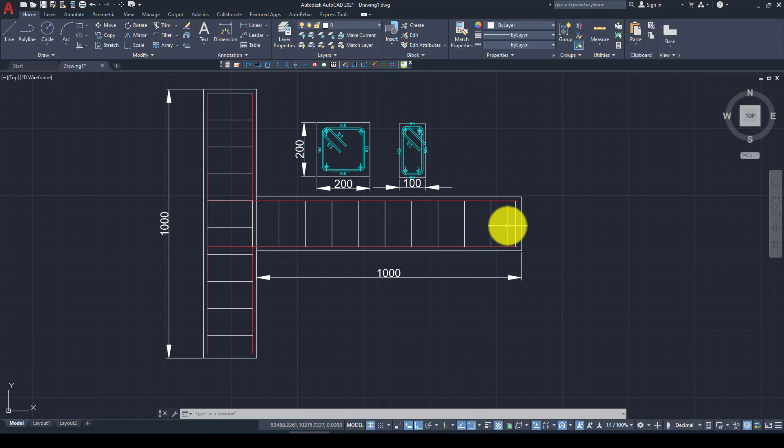The structure properties: 1 meter length of the column and 1 meter length of the beam. The cross section for the column is 200 by 200, with 4 rebar of 10 millimeter diameter arranged at the corners, using stirrups of 6 millimeters. The beam uses the same rebar, but the depth is the same and the width is 100, so half.

Now we go to model in ABAQUS. The material we're using is concrete 24 and steel Q235.

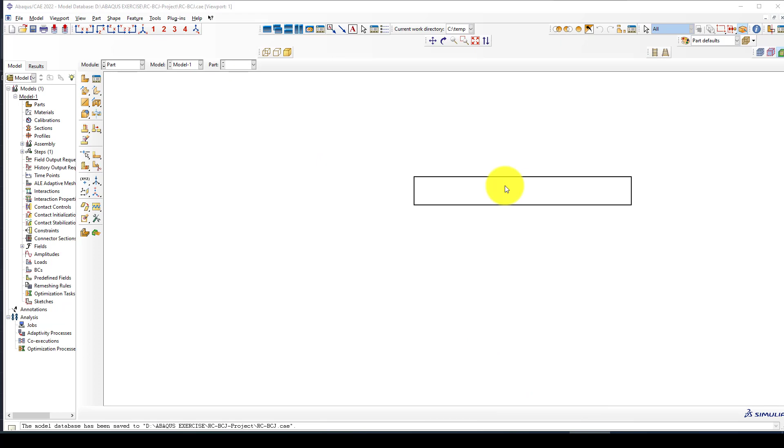Here is the program, and we go to quickly draw the column. Using solid elements, we can give about 2000 extrusion. Since this is 200, I'm going to go minus 100 by minus 100, and the positive one is positive 100. This is the column, and the length is 1000 millimeters.

The second part is the beam, using the same method. This time minus 50, which is the width of the beam, and minus 100, which is the height, and the second point is positive 50, 100. This is the beam, using the same technique, with length 1 meter.

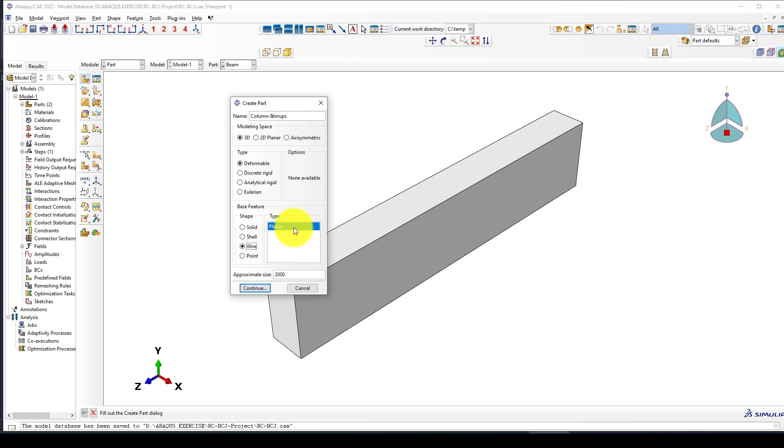Now the second part is we want to define the rebars. First I'm going to define the stirrups for the column, using wire planar and giving this data. The clear cover is 20 millimeters, so it becomes 160 by 160.

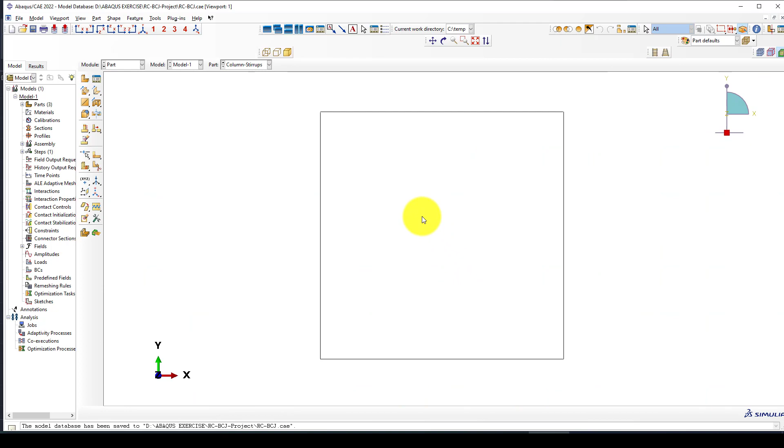Now taking the rectangle and giving minus 80, minus 80 and positive 80, positive 80. So this is the stirrup for the column, and we can go to one more called beam stirrups.

Using the same method, we check it again, and this is 10 millimeter, 80 by 180. Now we select this one and give minus 40, minus... and this is minus 90, and again 40, positive 90. So this is the stirrup for the beam.

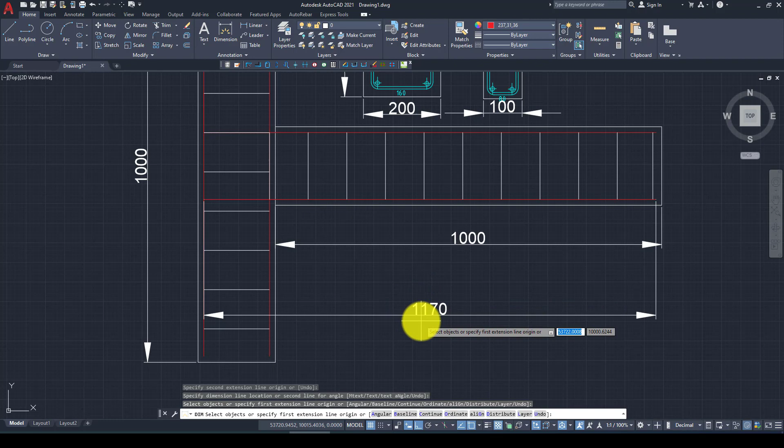Call this column rebar, using wire element planar, and I'm going to give 0, 0, and 980.

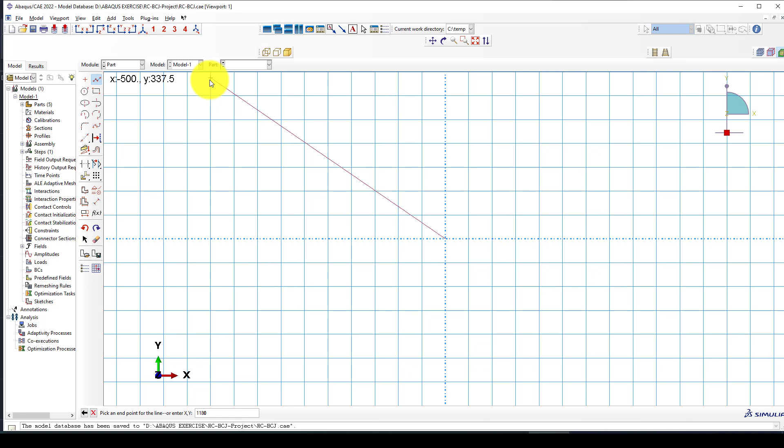So this is 2. Now we finished defining the parts, and I'm going to define the material properties here. I want to define concrete 24. It is in my library, concrete 24.

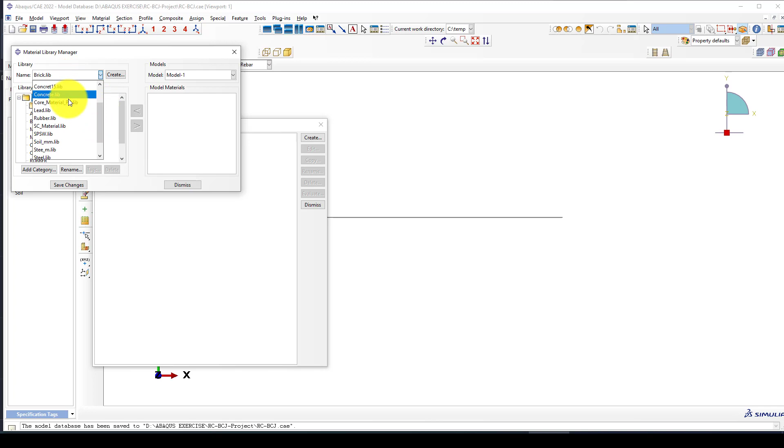This is CDP concrete 24, and I want to use steel Q235. You can see here. Here is steel 235, and now we can see the inside material.

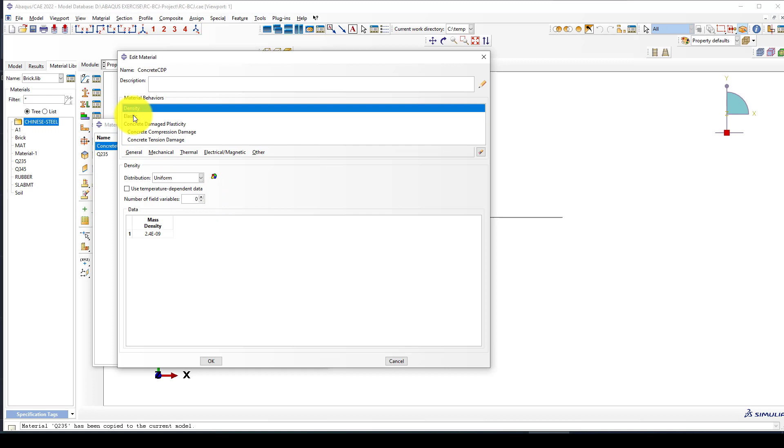So we will conduct a dynamic analysis. We need to define density as well. So density, elastic modulus, and plastic - these 3 properties. For the concrete, here is the density, elastic, concrete damage parameters, compressive behavior maximum 25, and the tensile behavior, and also tension damage, and other behavior.

So we're going to use a calculator: pi times d squared. d squared is 100 times 3.14, and divided by 4. So this is the number, 78.5, for the 10 millimeter.

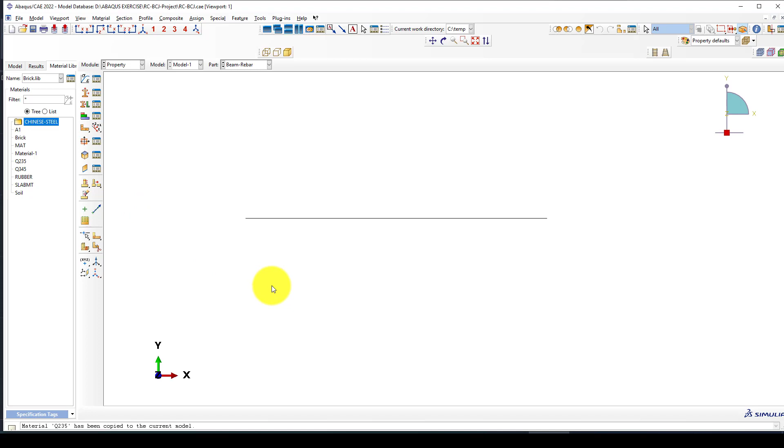And we want to define one called stirrups, and this stirrup is 6 millimeters, so we can get 28.3. If I calculate this one using the calculator: 36 times 3.14 divided by 4 equals 28.3, or 28.2.

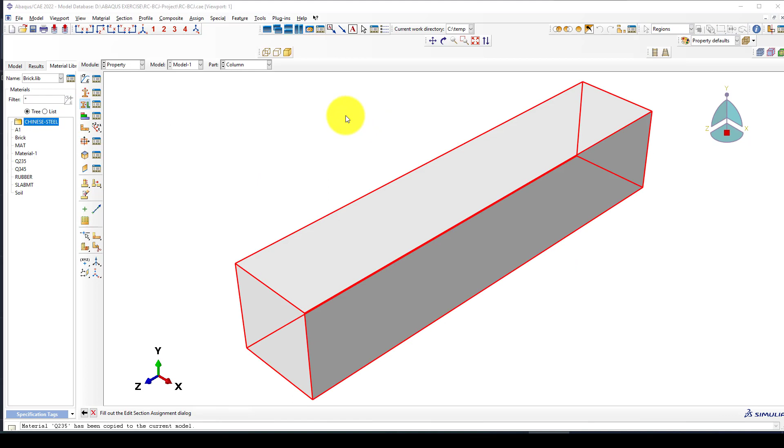Material - now we define the material, and I'm going to assign them. This is the rebar and beam. I think beam is concrete, and beam rebar, beam stirrups, and column stirrups, and finally rebar. Now we create it and assign materials.

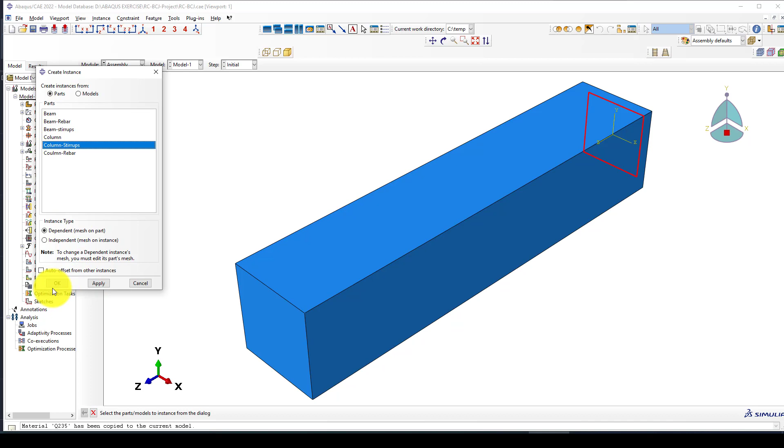We go to assembly, and first of all let me bring the column, and this is the column. Apply, and we want to take the column stirrups. So now I can use this function, and you can see it's in the center, but we want to take that rebar.

Let me temporarily delete this column, select this one, and push it 10 millimeters in the z direction. So start point is 0, 0, and 10 millimeter. We put it a little forward, and you can go to C, and it's inside.

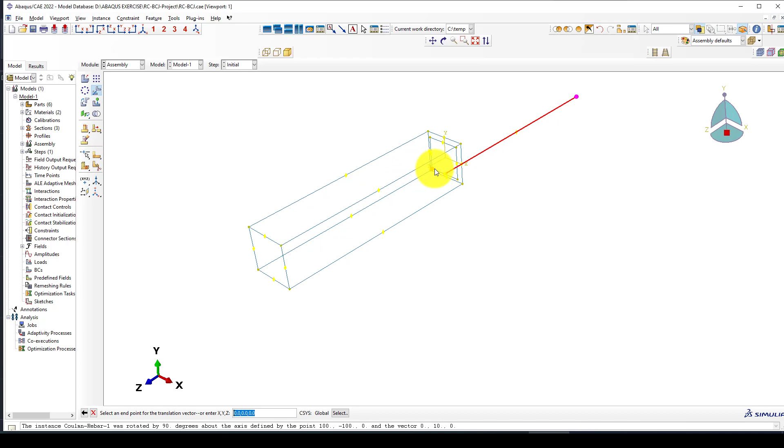If I go, okay, now next I want to bring the column rebar, and this is column rebar here, and I'm going to rotate using this axis, and I'm going to pick this rebar, that point to that point. So now let's click.

One more thing, I want to take that rebar, take this one and populate, and this is about 160.

So we created another 4, and I want to take this one again, but bring it a little further because the longitudinal rebar isn't correct, and I'm going to bring it a little further. So 0, then 0, 0, and this is with 10. Now it's better and correct.

Next I want to populate this one, taking this direction, I'm going to bring it forward, and this is off, and we can use 120. Populate. So this is the column, and it's correct to here.

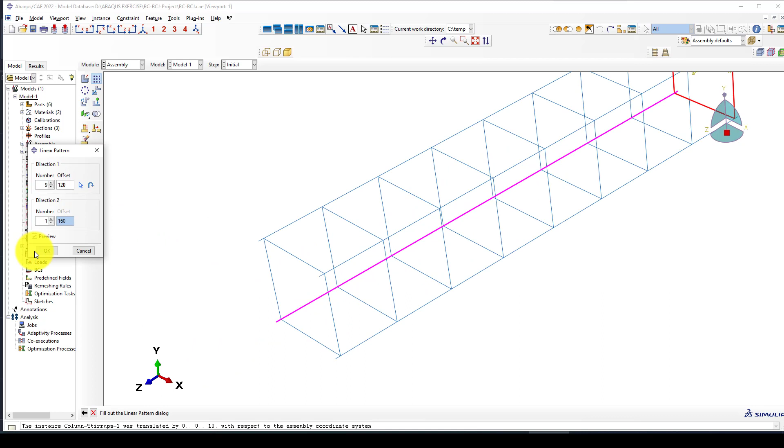Okay, so now we finished one part. So now next is I'm going to remove and select all of them.

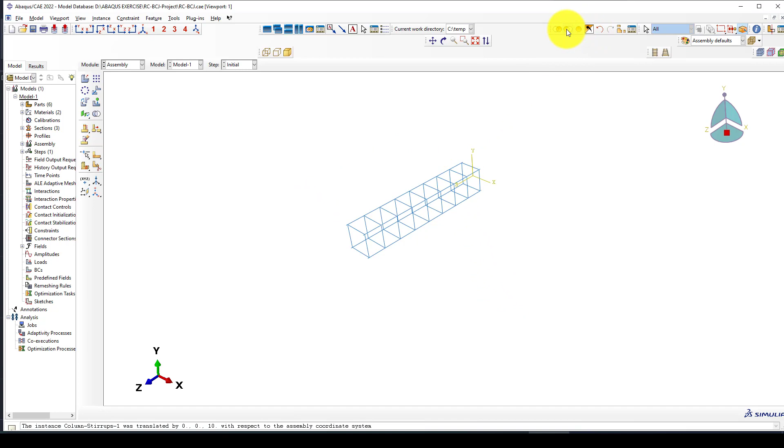Okay, and now this is part, I'm going to remove all of them, and then I want to bring the beam. This is beam, and this is beam. Apply, and the beam stirrups.

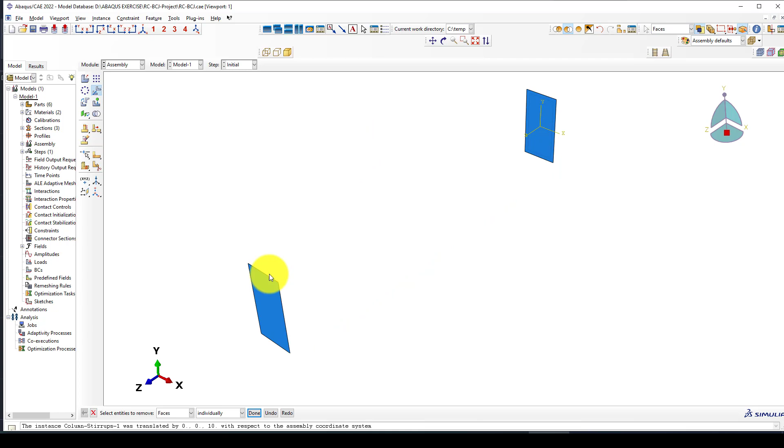Okay, and we can see the location is correct, but we want to bring it a little further. So we can go to here, and selecting this one, I go to undo.

Going here and just beam, remove it, and I want to take this one first, 10 millimeter, putting 0, 0, and then going to 0, 0, 10 millimeter, and that's it.

Next I want to bring the beam rebar, and I want to rotate across this axis, and I want to take it here, take this point and bring it to this area.

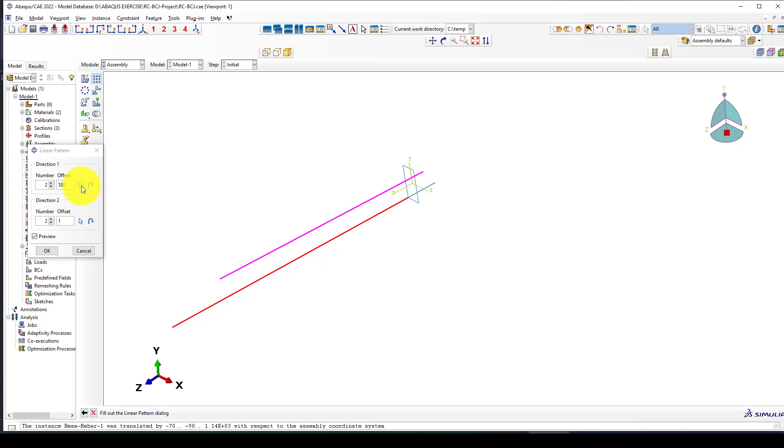I'm going to populate the rebar in the 4 direction. The height is 100, 180, 180, 180. Now you can see here, and this is also 80.

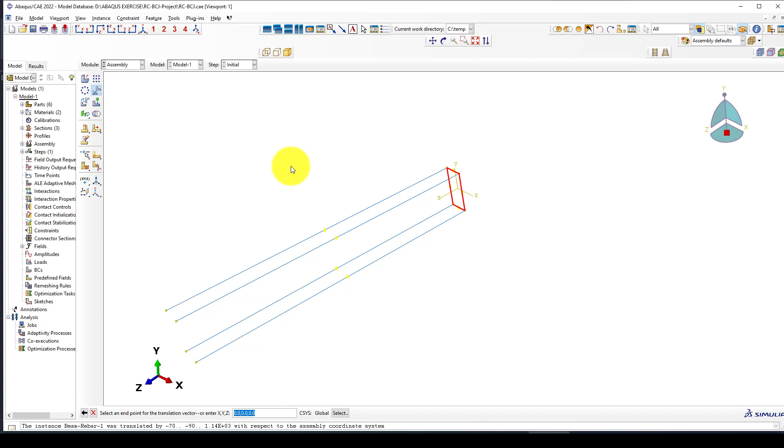And now we can just select here exactly. Okay, so one more thing, I will take this again, and this time putting 0 and 0, 0 and 10 millimeter.

So this is correct, and I want to populate this across the structure. This is also 120. Select this one and exit.

So remove these parts. Going to be, so this is okay, and even I can make it 10 and 10, and this is 100, and we want to move. If I go to add all, no need.

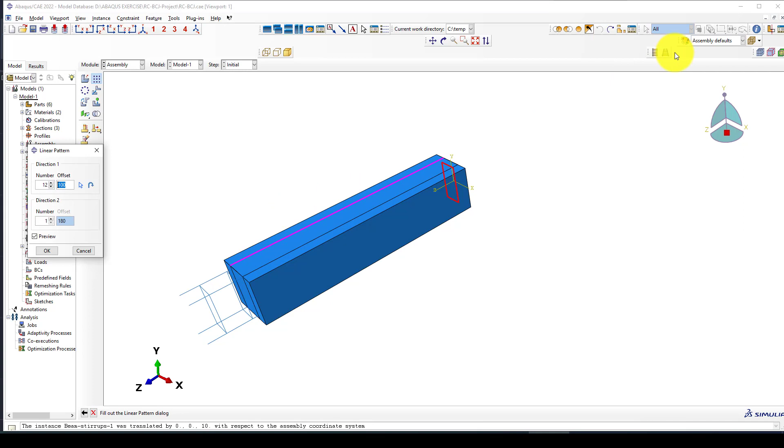So this is 2 is out. I'm going to take them 2 out like this. Now it's okay, and we created this area.

Now what we're going to do is bring the column at the beam, and I want to rotate, selecting all, and rotating this using this direction. So it's a little not in the right side, but I'm going to add everything.

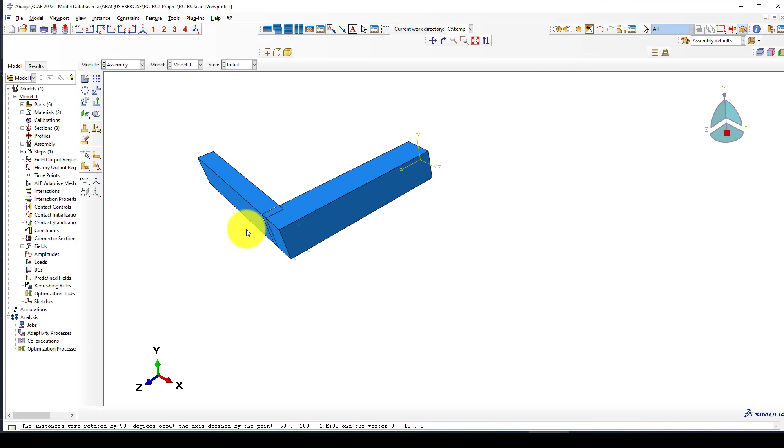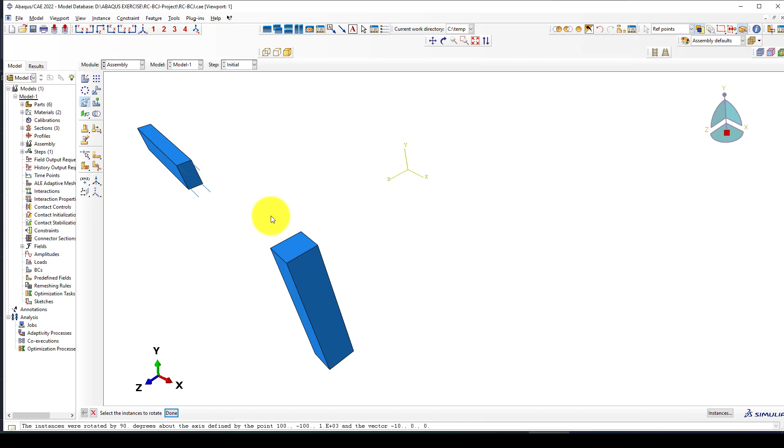I'm going back here and making a little changes. So I'm going to put this to there, and now I can bring this as well. So I want to rotate this, selecting this one and this one here, and I'm going to take this.

Select all, and I want to put this to 0, 0. So now I want to take this one and rotate one more time, and that should be 180.

So it's correct now. So now before I put in the right position, I want to go to the part and take the column, create some partition. So I use this method.

It is called create datum plane from offset. So I'm going to click this one, and I want to define the location of the columns. So if I go to here, and I can select this point 400, and this also 400.

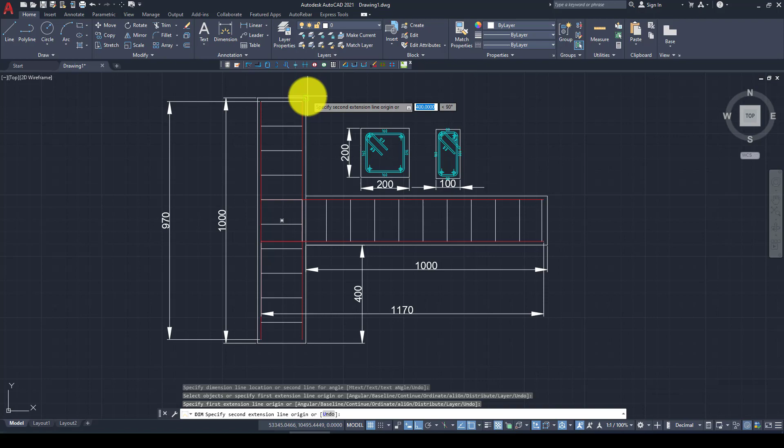So what I want to do is going to enter value, and it's going to flip that side. Okay, and it will be 400. So one in another one, going to select this one.

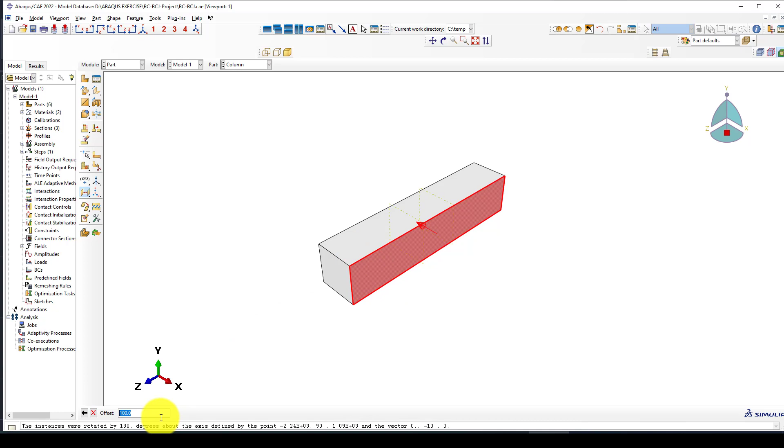Okay, and this time going to 600, which covers the 200 height of the column beam. So now in this direction here, okay, the depth of the column is 200, so it's be 50 one side, 50 one side.

I'm going to use this one again, and this is 150. So 50, 100 the depth of column, 150. So here, now I want to create some partition using this one.

So selecting this column and selecting this one, selecting these three, and this one. Now we created some partition that's very important, and we can see here. If I want to not see this, I can go to the view.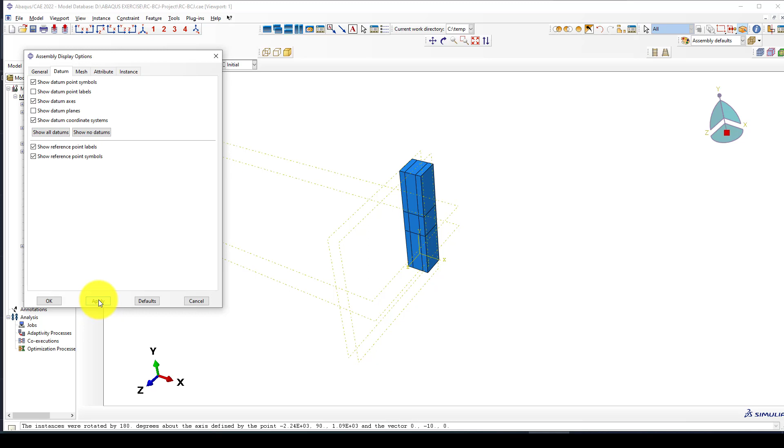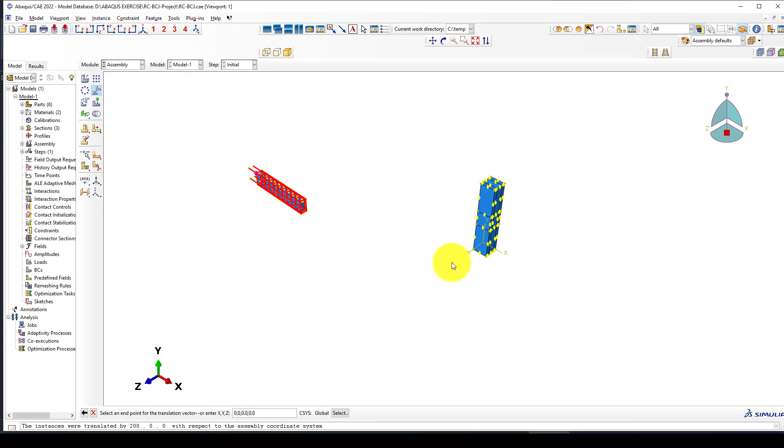Now you can see there is hiding. So what I want to do is rotate this one again, select all, and into here select 180, and bring it to the center at 0,0. Now this is completed, and I want to take this point and bring it to this point, and now it's totally correct in the right position.

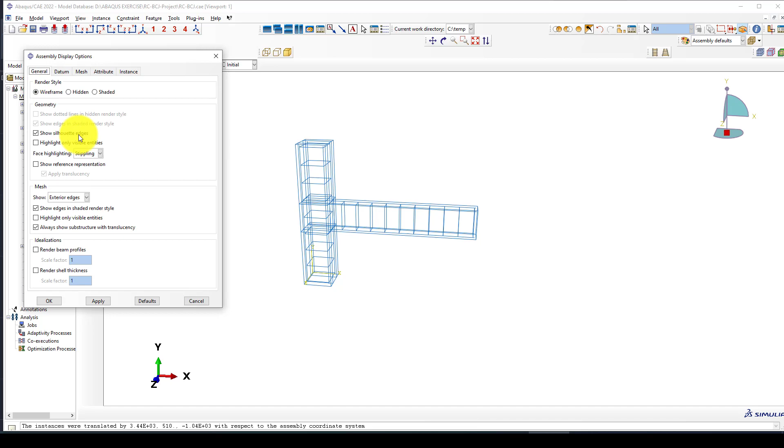If I go to here, you can see the rebar configuration and everything is properly right. So I can also go to view and show some rendering, select the beam rendering, and you can see how it looks like. And I can go to use section, and if I go to change the longitudinal rebar to something, here it is.

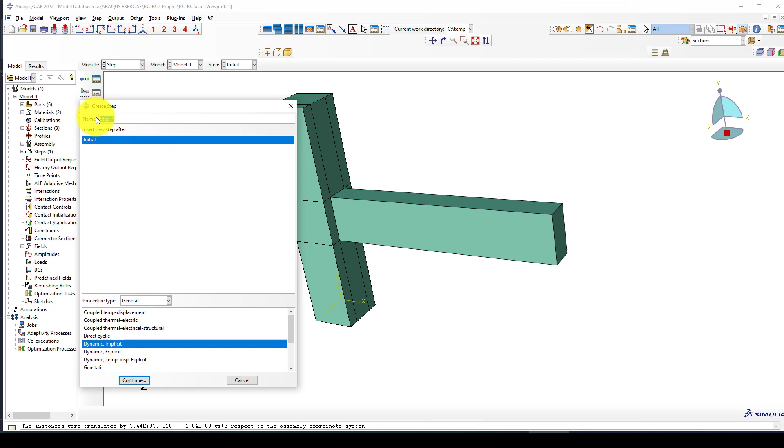So we finished in this area, and we can go to the step. We can direct cyclic dynamic, which we use quasi-static or cyclic application. I'm going to use implicit.

And we can create one more thing: the loading for the steel structure we can apply in this part, but for the concrete column it's not correct. We should create a partition in this region and define this location.

So what I want to do is go to part and select the beam. I want to create one partition in this region. I'm going to select this one, and select this one and flip, and I'm going to give 50 millimeters. So this is a small area, and I'm going to partition this one.

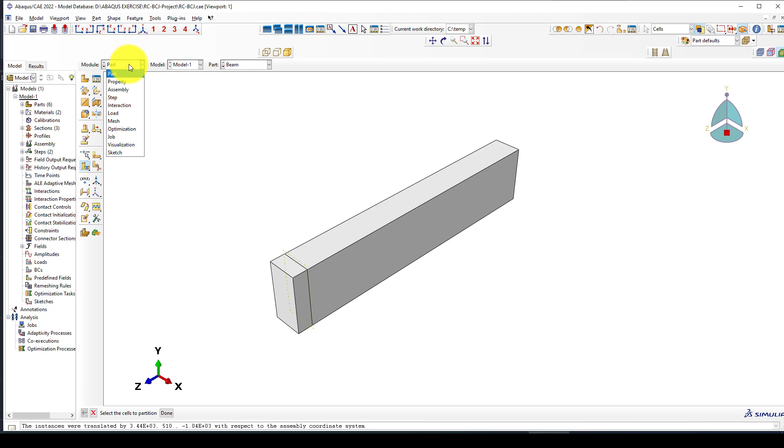If I go back to assembly to see how it is, it's here, but I can go back to part and delete this one, and delete this, and redefine again, this time flip, and I'm going to use 950, which goes here, and I'm going back to this one, and it's going to create, going to assembly, and we created this location.

So you will apply load in this area.

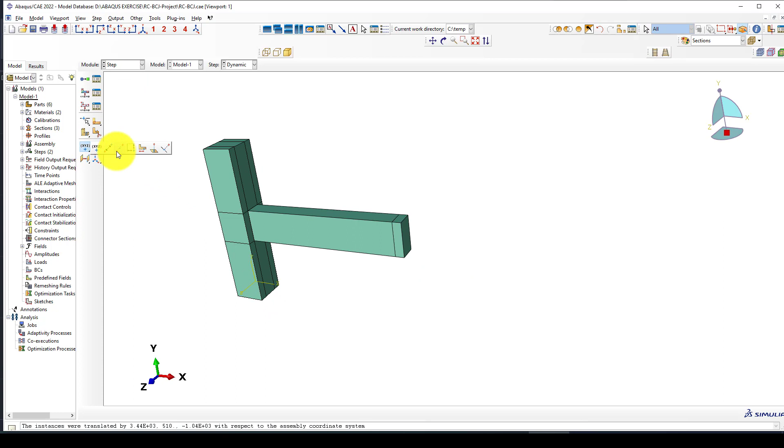Next we go to the step and we can create some points. Let's create a point in this two center, and let's create one point in this two center. Because our work is not considering the top and bottom of this structure, instead we are focusing on this beam-column joint. For this purpose, we will consider a diaphragm on top of this, or a stiffener in this area. We're not focusing on seeing the behavior in this area as well as in the bottom, and also in this area too.

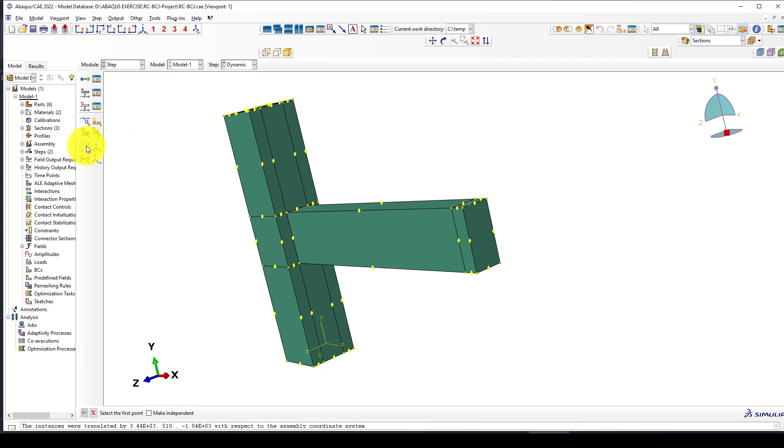So this is it, and we want to create some reference points. This is the first reference point for the loading point, and this is the second, considering this other side is quite stiff. We are not going to deform these parts.

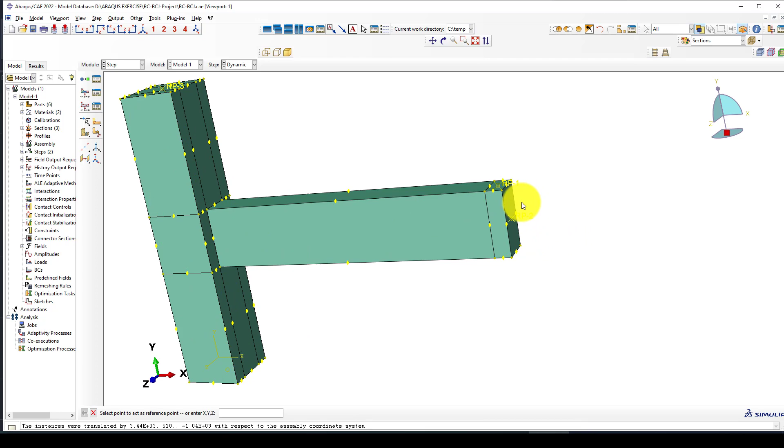In practice, let me show you here is the paper. Here is the paper, and on both sides for the loading we have some support. That means they will actually not deform, but instead the deformation concentrates in this joint. So we will focus on this area, and we will add some diaphragm in these two other areas.

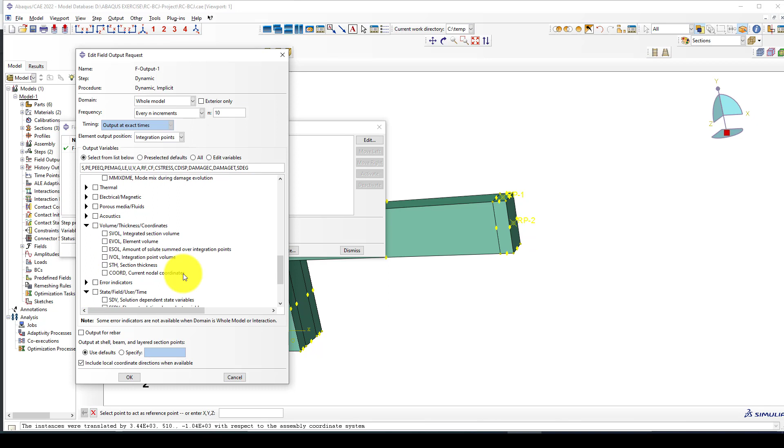Now what we're going to do is I'm going to create and define some extra output. Let's take the failure damage, and I can see the scalar stiffness degradation, and also some other deformation.

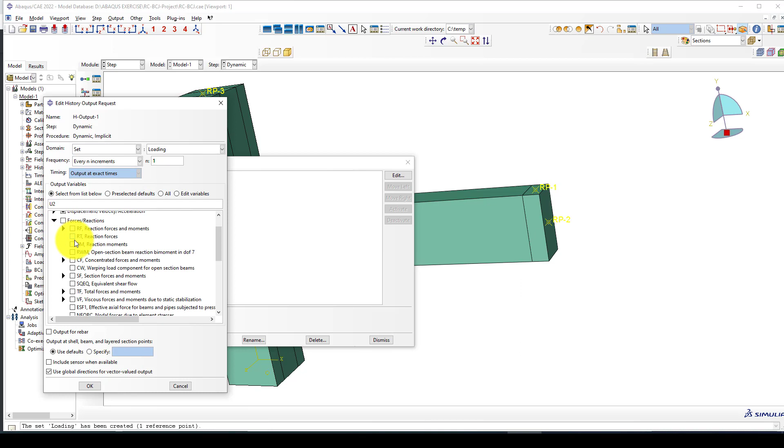And the last one is to create history output, especially the reaction force and displacement at this point. So I'm going to create a set, and I can call it loading point. That loading point is this reference point, and here I don't want to get any energy output, so I'm going to select the set and this one, and give every increment. So that's all okay, missing value. We have to define the U2 in this direction and RF2 and this one. Now we've almost finished here, and we go to the interaction.

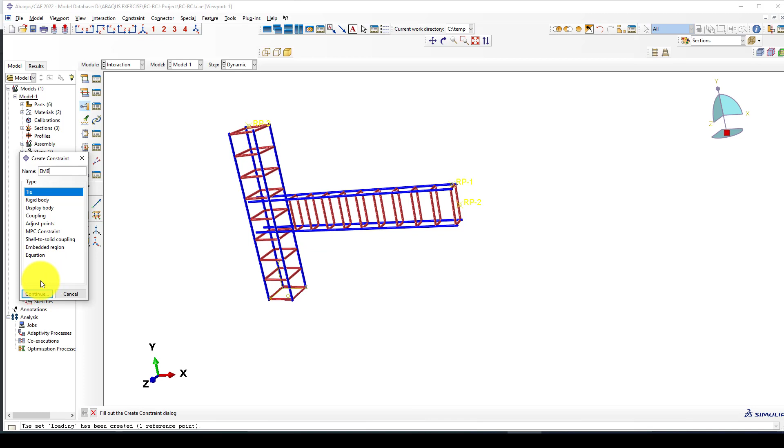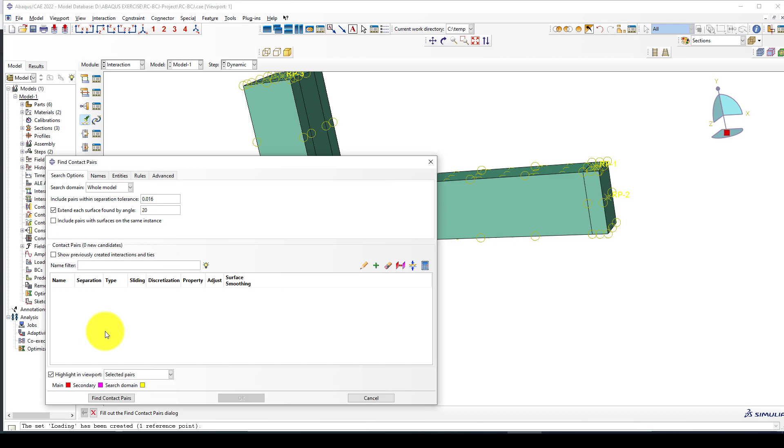So now we define an embedded region for the entire structure, and next I want to define a contact between this concrete and beam column. I can go to determine here automatically, and find one contact, but that's not proper because it's contacting with a large area. So I'm going to use another method.

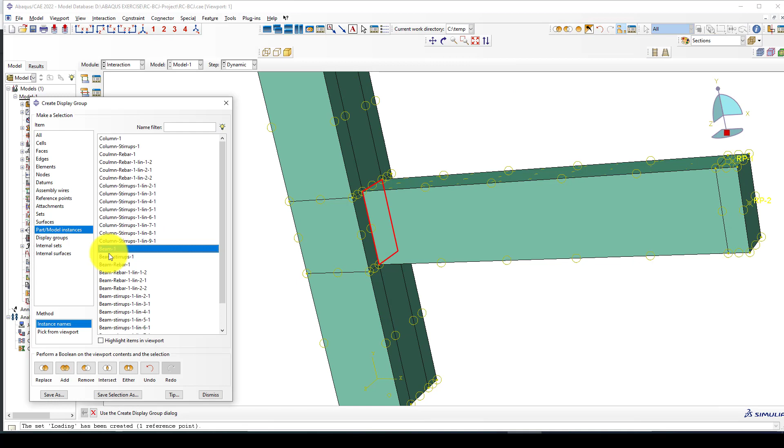I can go to contact, not surface to surface, but instead use tie. I want to select node region. I'm going to take the column, replace, selecting this surface, and add another node region, selecting everything, select beam, replace, and now selecting this area. So we created the surface to surface contact with the tie method, which has no deform movement, which is quite practical.

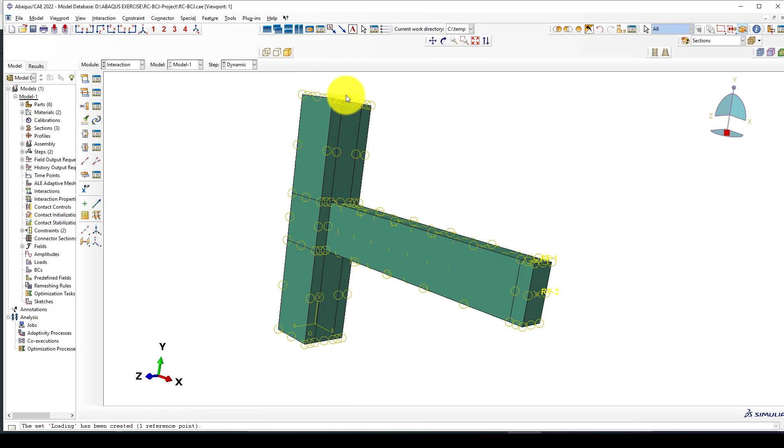Now we finished, and now we want to define some multi-point constraint, tie, or coupling. It's up to you, the behavior is the same. If you use tie, coupling, or multi-point constraint, it's okay, not too much difference. I will use multi-point constraint.

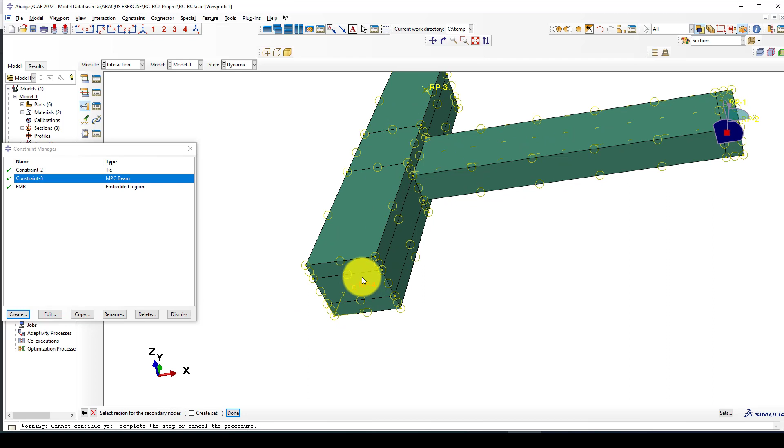I'm going to select this surface, this surface, this surface. So this is it, and I create this point and one at this point. I forgot to define first, let me define a reference point here, and now it's done. I'm going to create, selecting this one and selecting this area.

Now the next one is this one. Create one other multi-point constraint here, and selecting this surface. For this one I can use coupling, so there's no problem. I can say coupling this point as coupling, and it asks me to take the point, select a control point, and this is the control point, and I'm going to use node region.

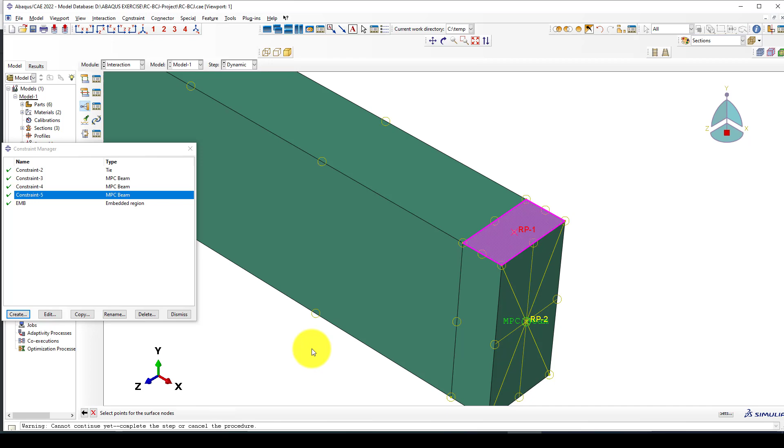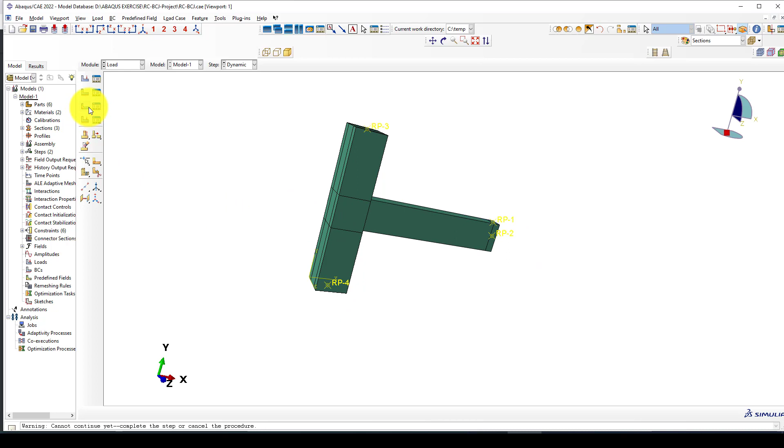So we finish the interaction step, everything. Now we want to go to the loading. In the loading, I want to consider this side is totally fixed, and I can go here in the static, call it fixed, symmetric, fixed.

And I can call it fixing ENCASTRE. So the last one is we're going to go to the displacement, using the dynamic, using this one, and selecting this point. What we're going to do is give a minus 20 during 5 seconds. You don't need amplitude here, though you can use one, but in the next tutorial we will consider the cyclic loading, so we will define an amplitude too.

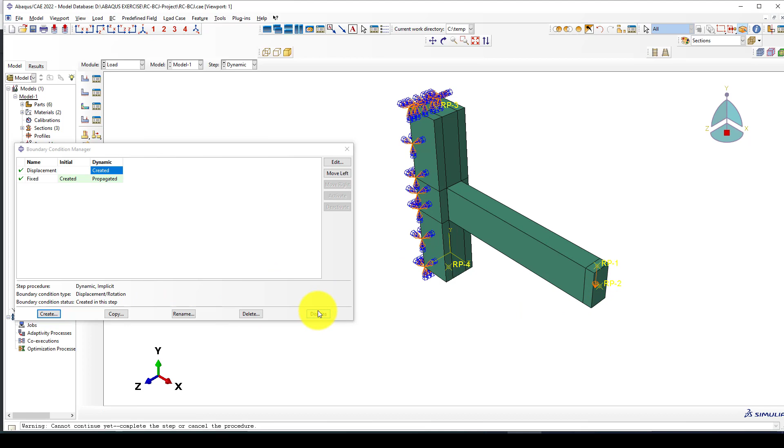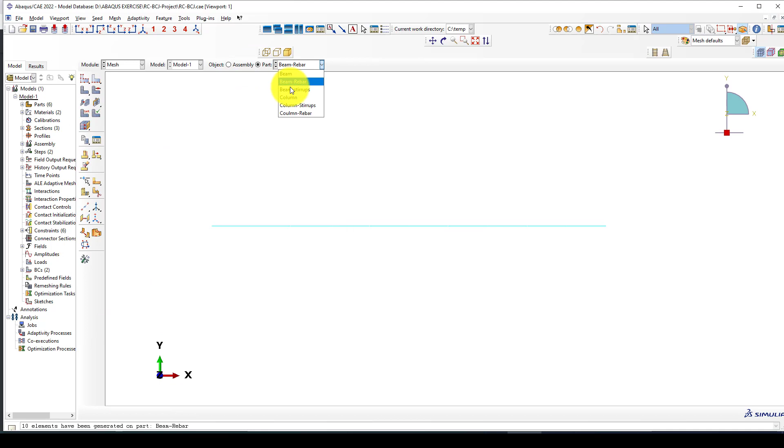So now it's okay, we finished, and we go to meshing. Into mesh, and here is meshing, and I want to give a mesh size of 50, which is maybe quite large. Beam rebar at 50 is okay, and remember to define the element type because it's using beam, so this is actually truss. I'm going to define the elements here, stirrups is going to 18, the same.

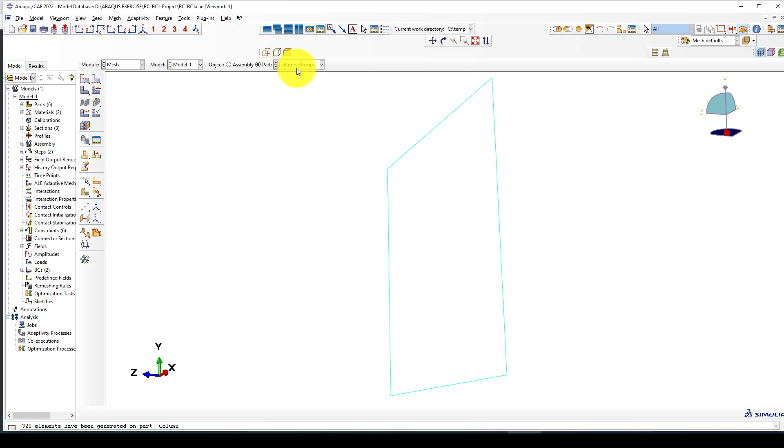Using truss, and column using this was 50 with the beam, going to add it, and column stirrups and column rebar 100, truss. Now we finished the meshing, and we can see the meshing is completed.

I'm going to create a job, and I can call it RC beam column joint. Submit it.

It shows the following points instead cannot mesh, beam stirrups. We go back to mesh. We forgot to mesh the beam stirrups, it's not meshed. Using 18. Okay, and we want to define the element, so truss. Now we're going to go to submit.

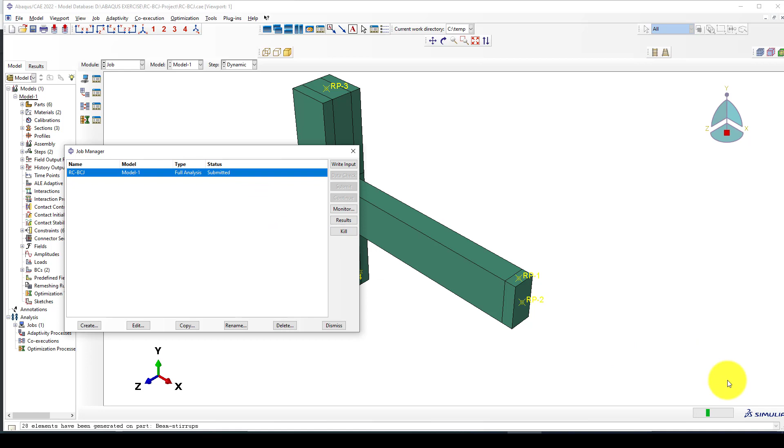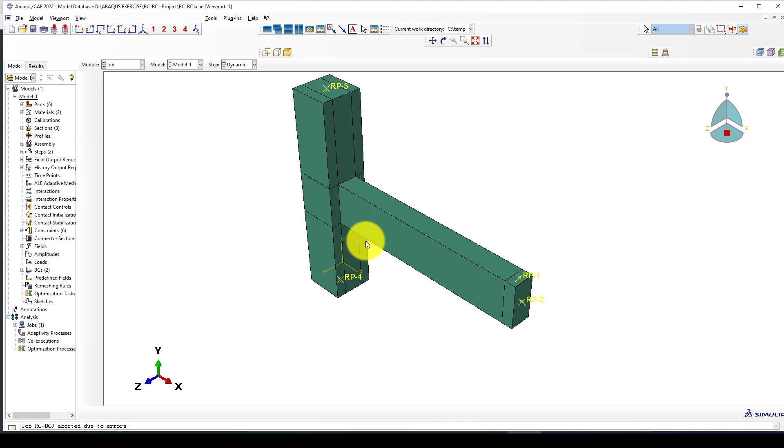Now it's started running, and we can go. Here is some error. It's called 3 nodes or missing degree of freedom, the multi-point constraint equation cannot be formed. So if I go here, and go to result, I can see that warning. That was the node, this is the warning node, and that 3-node point didn't create the multi-point constraint.

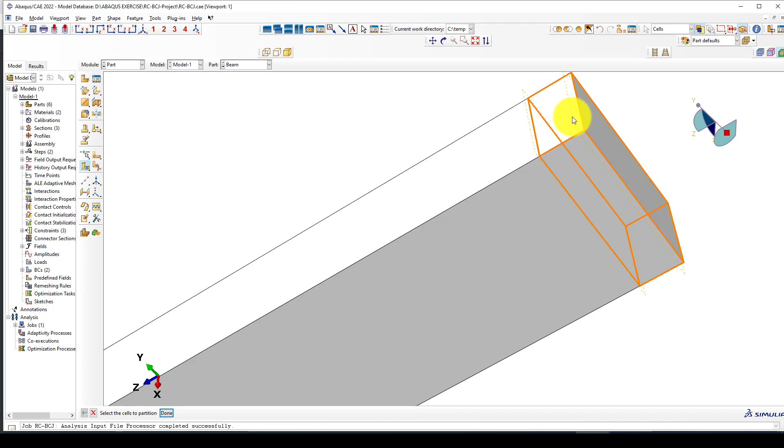So I can go just in the beam, and we want to create this area, so I'm going to use this one, selecting this, and I'm going to flip, and give it 5 millimeters. It's very small, so 5 millimeters. I'm going to use this one, and so we have created this one.

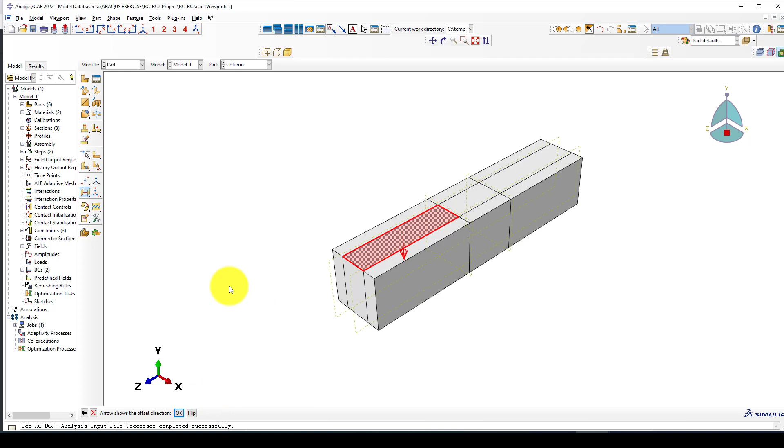Now we will consider the boundary condition here and the multi-point constraint here. I'm going to column, so the column is also the same, and now we can create. We can go to select this one, and select this, flip it, and it's about 5 millimeters.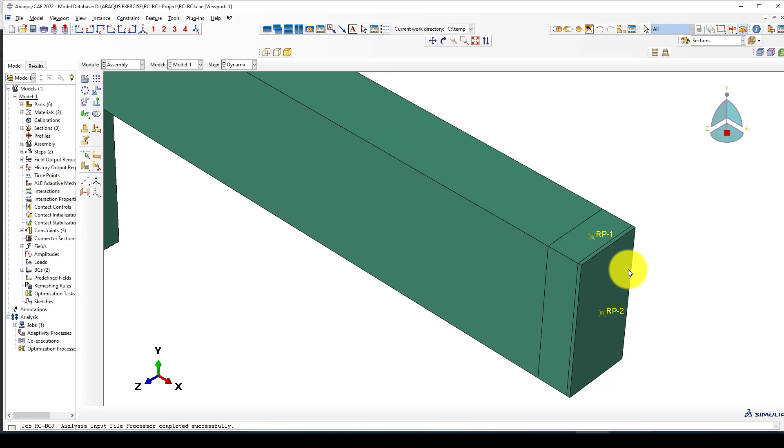So we created this one. I'm going to select this one and select the entire area, and it asks me if the mesh will delete - yes. So we created this one. If I go back to the assembly, this is here, okay, and that one is also in the right place.

And I go to interaction, and again I can define that multi-point constraint. Selecting this point, and selecting this point and this point, and this is what we have selected, and this is the control point. So we do not consider that little area.

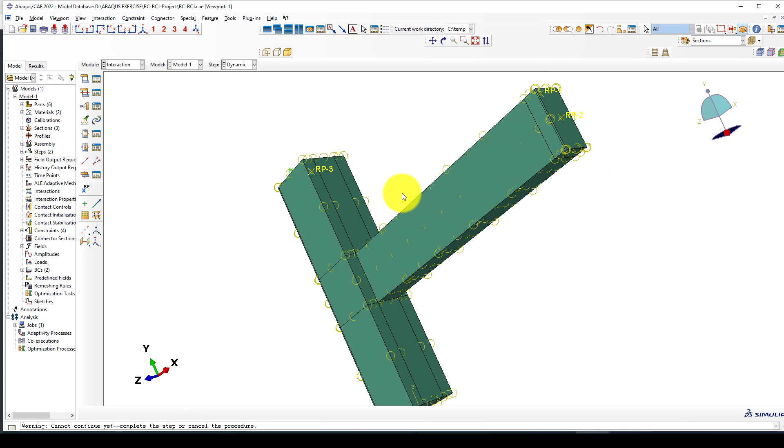This is not the correct area, so I'm going to define a multi-point constraint. It should be here. Going to reference point, creating this reference point, then going to interaction and creating a multi-point constraint. This is my control point here.

So now we release that area which should not be coinciding with the boundary condition. Same for this part as well. Going back to multi-point constraint, selecting this one and selecting this area.

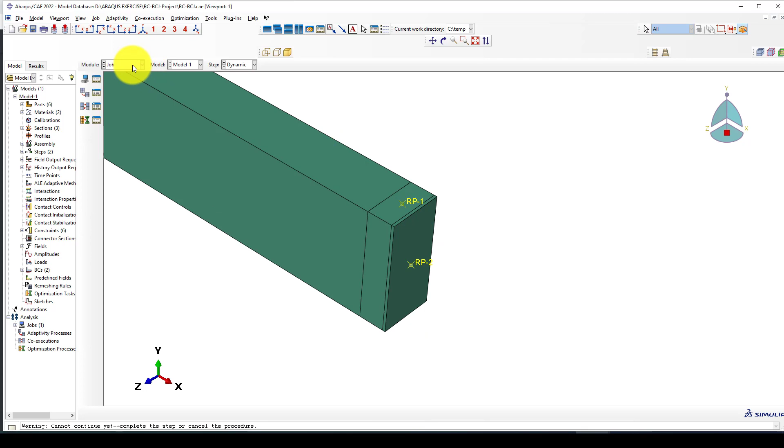So we're done, and there won't be an error, but we should go back to mesh and define the mesh for the elements. I'm going to use 50, and going to be here. Next we go to beam and define 50 and mesh it.

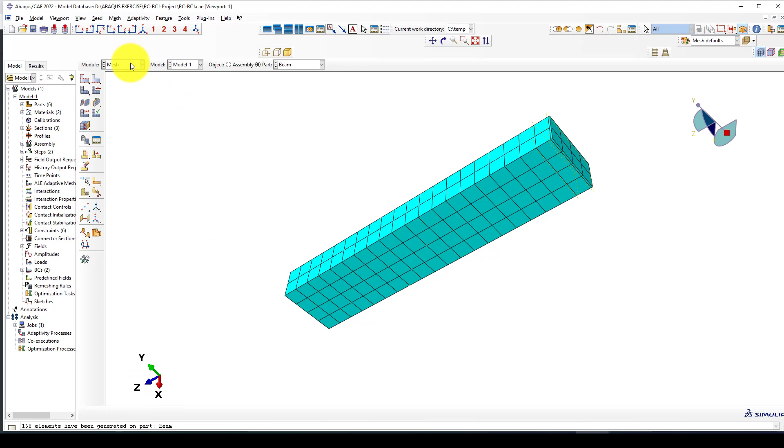Now we can go to the job. Let me check it. Monitor.

The analysis is almost completed, and I'm going to resubmit it again. In the previous run it was without considering these things, so now we fix that using this method.

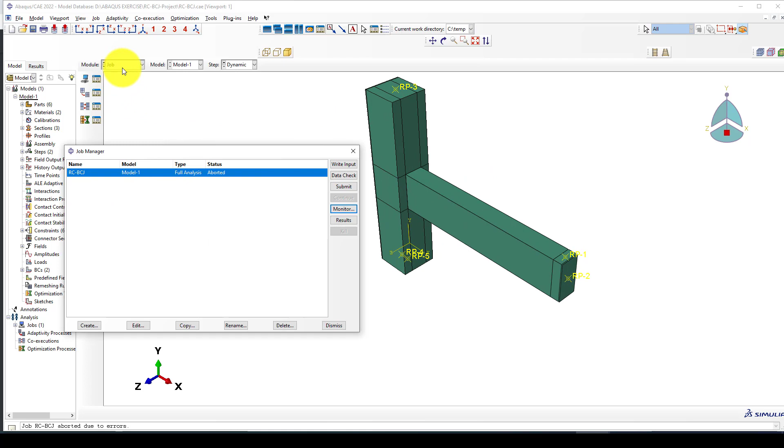We got this error again. The error is because we didn't change the boundary condition of displacement in that area. So I'm going back here in the displacement parts, and we can see that displacement is coupled with this area.

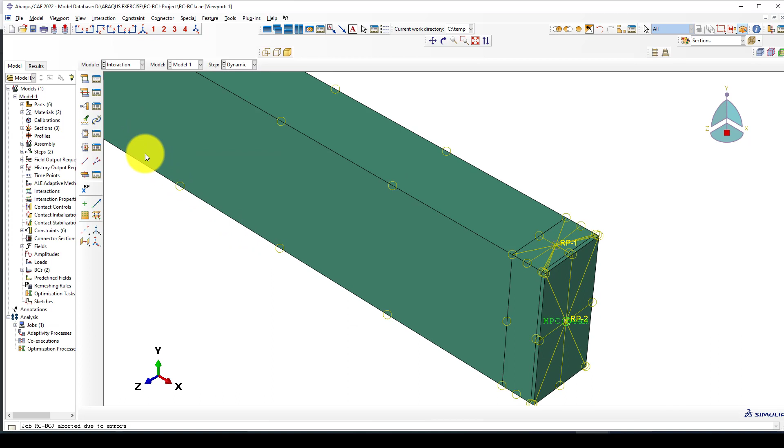So what I want to do is go back to the interaction here. One was used coupling, so this coupling is this here. I should remove these parts.

I'm going to pick the surface and deselect. I want to select again node region, selecting this area, not these parts. That's it, the error will be 100% fixed. I'm going back here and going to submit it.

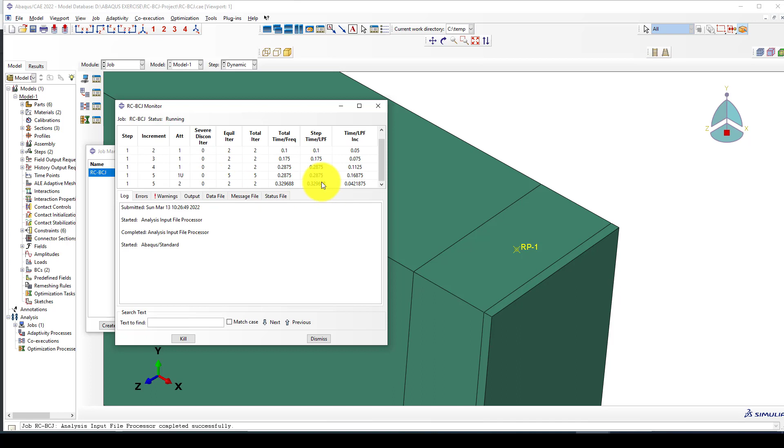Now it's running, and we can see this is the running status. It takes a while to finish, so I will pause the video, and after that we will see the result.

Now the analysis stopped because it made too many attempts for this. Sometimes this is caused because a lot of deformation occurs, cracks, some end deformation happens. So we can go to see just the result. If the result is acceptable, if there is deterioration, we can say yes, otherwise no.

Now we can see the steel has reached the ultimate strain, so obviously there is lots of damage in the concrete. What we're going to do is go to here, call parts, and take the beam and column.

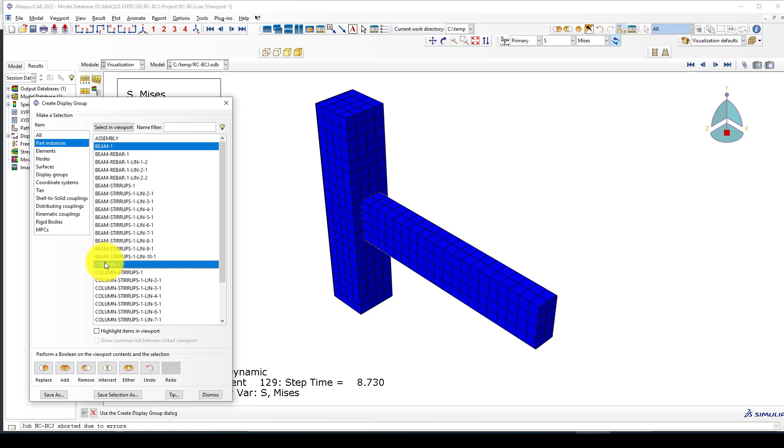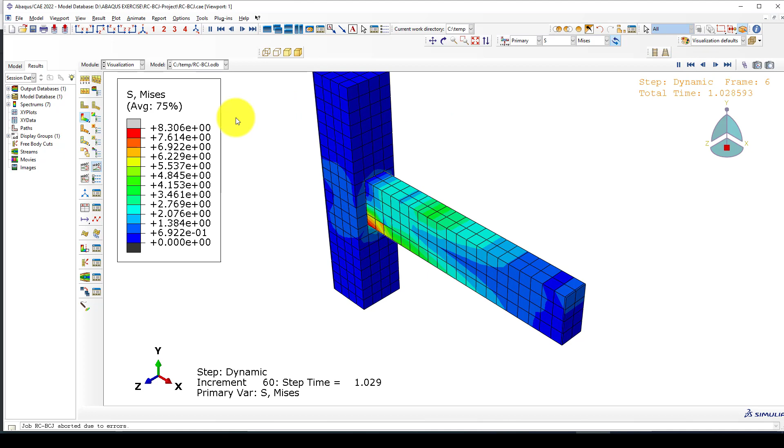I'm going to replace, and you can see here is about 7 megapascal. Let me do animation, and you can see the multi-point constraint we defined, which causes the stress and damage to be considered in this total area.

Now what we're going to do is show the concrete damage. Still the compressive damage hasn't reached, but in tension, mostly this area is in tension, so significant tension has happened. That's just two elements left, the other is totally collapsed or failed.

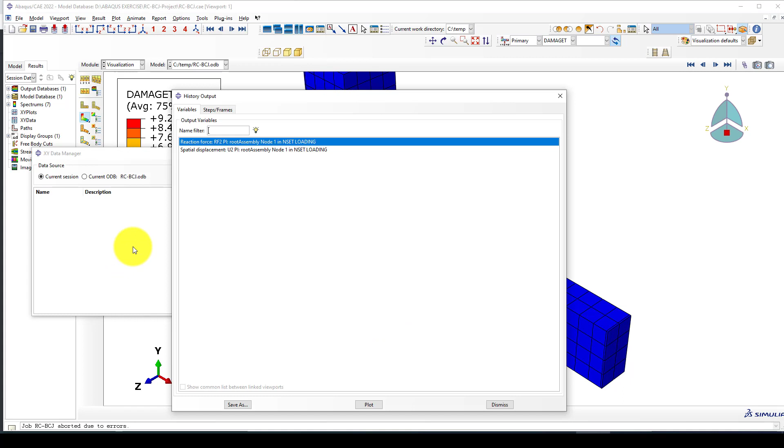In case I consider a dynamic analysis and define some concrete failure, then this element should be removed, so there's nothing left, and obviously we will get a curve with deterioration in the output, and we want to define these two data.

So here is the result, and it's very nice. I'm going to create the operate, create combine, and that should be -1 times because it's in negative, and comma, again -1 times for RF2. I'm going to save, called force displacement curve.

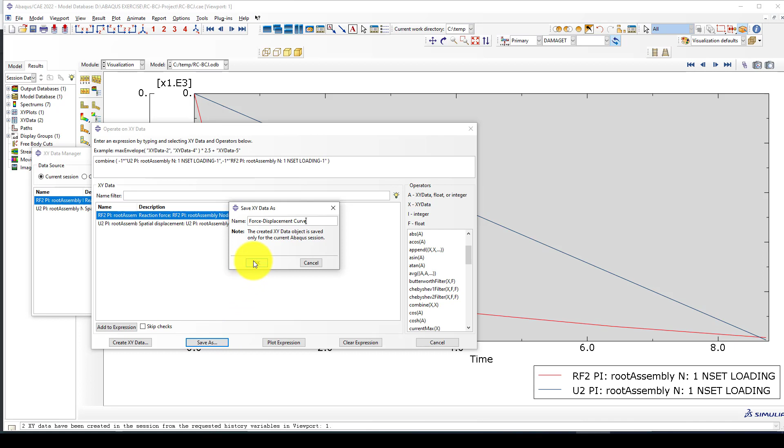Now it's okay, and we can go to plot this one. So this is the behavior, a very nice result, which costs about 10 kilonewton to deform.

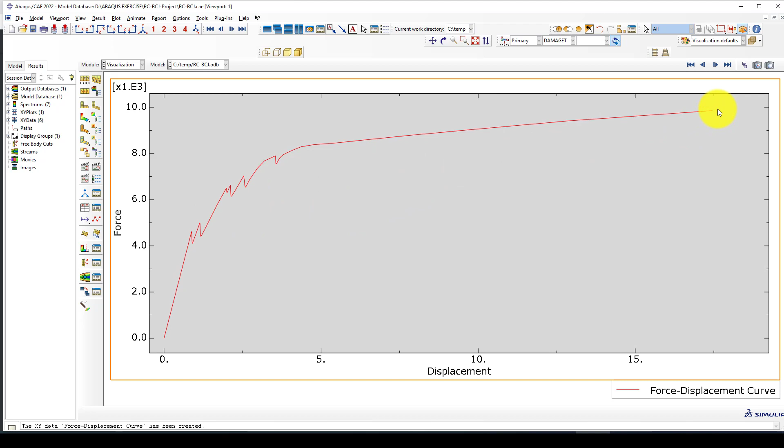We didn't define some degradation or failure, so we didn't reach more, but we have something that could give a better result. We should define a fine mesh. This mesh is not correct because it's very coarse. When it's a large mesh, some elements will deform very well, and large areas will deform, because the finer the mesh, the better the result.

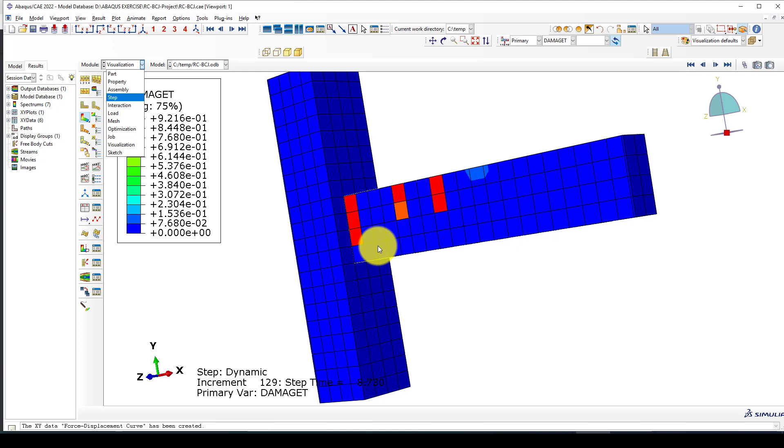If I go back and change the column and beam mesh size, you will obviously see a little difference in the result. If I continue to change a lot, the video will become much longer.